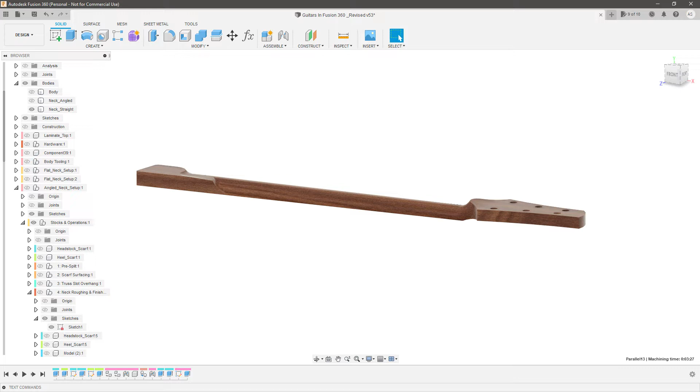In the last video, we took on one of the most challenging parts of guitar machining, flat guitar necks. However, in the world of guitar machining, there's yet another final boss, an order of magnitude more difficult: necks with angled headstocks. Angled necks are probably the #1 thing that intimidates people about building guitars with CNC. And for good reason. It has a very complicated shape.

It requires precision in your glue-ups and even more complicated toolpaths and work holding. Not to mention that there's no single or even two-sided setup where all these features are accessible. We're dealing with a 3-sided machining monster.

So I spent the last few months thinking about the best ways the average person at home could take on such a project. I came up with almost 100 different methods, but each had serious limitations that essentially forced you to choose which part of the process you want to make difficult for yourself. Well, frustrated with my options and about ready to give up, I took to Discord to get viewer opinions on the ideas that I was working with.

I was gently reminded by one of my viewers that I might be approaching this the wrong way, that I shouldn't be thinking necessarily about how to work around the problem or finding the cheapest or fastest way to do this. I should be developing a repeatable process for the guitar community, regardless of complexity. And then, once I have a repeatable process, finding ways to make it more streamlined and accessible to the public.

This changed my frame of mind, as after all, I am a process tech by trade. Process techs develop safe and repeatable manufacturing processes that ensure quality by mitigating the chance of human error. So, if I put on my process tech cap, how would this change my approach? Well, that is precisely what I would like to show you.

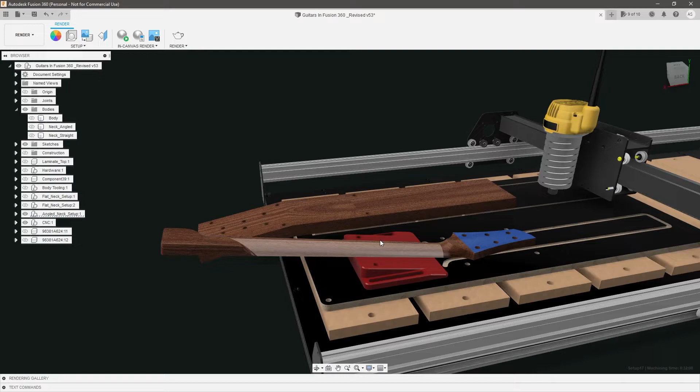You might be able to if you have enough Z clearance on your CNC, but if you don't, then basically you're stuck with just machining this little section. In fact, here's an easier way to show you. So if I hide my CNC, and let's hide my fixture, and just bring up my neck. And if we go into the manufacturing workspace, there's a really cool tool in here that many of you may not know about. So if you go to Inspect, there's Accessibility Analysis.

And what this does is it lets you effectively see what part of your model is machinable with a flat cutter from any given direction. So I selected my model, and so if I'm looking at my model from this direction, everything that's green here is machinable. But if I even tilt it a little bit this way, you can see that these sidewalls and these tuner holes aren't accessible, and this backside's not accessible.

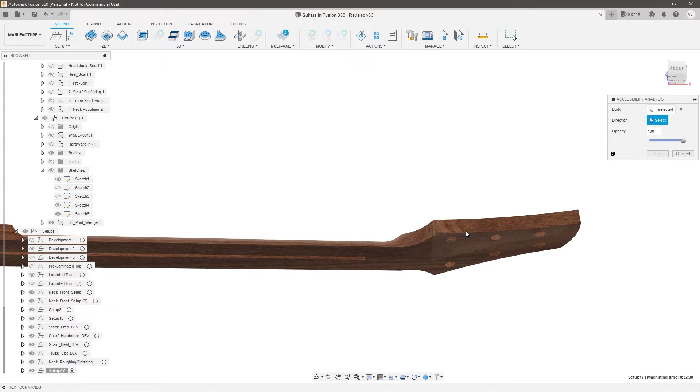And so then I can flip the direction, and I can see, well, if I'm machining it from this side, all of this is accessible, except if I turn it this way, all of a sudden you can see that part of my headstock transition and my tuner holes aren't accessible either. And so that means that really, with those two setups, I can't hit all of the critical dimensions that I need to hit. So there's actually a third setup that has access to just about everything, but it presents a really big challenge for your CNC.

So let me see if I can rotate this real quick. I think I have it on fixed. Let's go to free orbit. There we go. So if I mount my neck like this, right, then I have access to basically that entire top contour of the neck.

The challenge is that raises my neck up at a very extreme angle and really high up on my CNC, and I don't have the clearance for that. So that effectively means that we need to both machine it from this side and then we need to machine it from this side. And then we also need to machine whatever we can from this angle to clean it up. So that's a really tall order, and that means that our work holding has to get pretty elaborate.

But there's also one additional thing that makes an angled neck much more difficult than a straight neck, and that is a scarf joint. Most of you watching this are probably familiar with a scarf joint, but just in case you aren't, essentially what you do is you take your blank and you slice it at an angle and separate it into two pieces. And then you actually take this piece and you flip it 180 and then glue it together like this. What that does effectively is it allows the long grain in the neck to extend most of the way up the neck, but then it switches the angle of the long grain of the neck to follow the actual neck break angle.

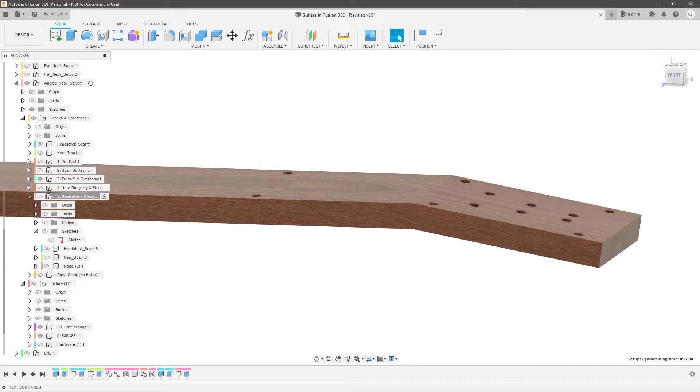And the point of that is if you built this out of a single piece of wood, what you'd end up with is short grain on this front face. That makes it particularly weak under string tension, and it's very easy to snap your neck at that point. So that's also something that we have to take into consideration. So we can either do this manually by ourselves in our home shop, or we could actually find creative ways to let our CNC do it for us. And so now that we've got this out of the way, let me show you guys the method that I put together. All right, here's the game plan, folks.

First thing we're going to do is rough trim our stock on the table saw and bring it down to the correct thickness, either with a facing operation on our CNC or with a thickness planer if you happen to have one. Then we will place our fixture on the CNC and insert 4 dowel pins to align it with the machine. Then we're going to place our rough stock over the left side of the boundary with double-sided tape. This will allow us to bore out the tuner holes and dowel pin holes that will be used for alignment throughout the rest of the process. Then we will cut our outer contour so that we have a perfectly dimensioned blank to help us a lot when aligning the part for glue up.

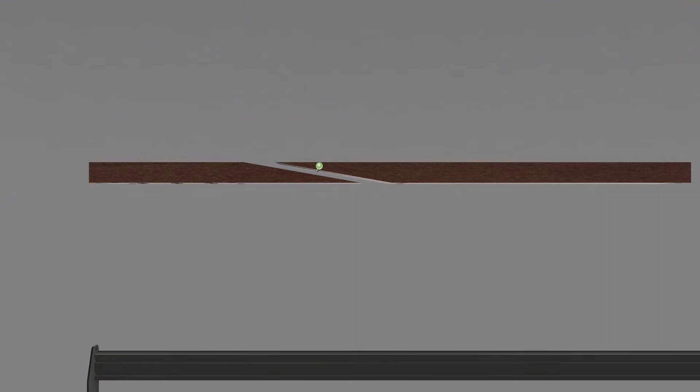Now we can take the blank off of our CNC and split the part in two with either a pull saw or a bandsaw, making sure to stay within a fairly generous safe zone. It's important to stay as close to center as possible during this cut, as any remaining stock on either side of your saw kerf will effectively be our stock to leave in the next operation. Then we will place 2 dowel pins into the fixture and place the headstock side of our blank onto the fixture with double-sided tape. Then we will be able to do a scallop operation with a ball nose end mill to true up the rough cut surface and leave us with a nice scarf joint at the appropriate angle. Then we will take that off and do the same thing for the heel side of the neck.

Now we can take both parts off the CNC and clamp them together without glue and drill 2 dowel pin holes through both pieces so that we can realign them once we apply the glue. It's really important to take your time and get these as perfectly aligned as possible before you drill your holes, because any mistake here can cause alignment issues later on. Then, once the holes are drilled, we will unclamp the parts, apply our glue, put them back together, insert 2 dowel pins into our holes, clamp them together, and let the glue set.

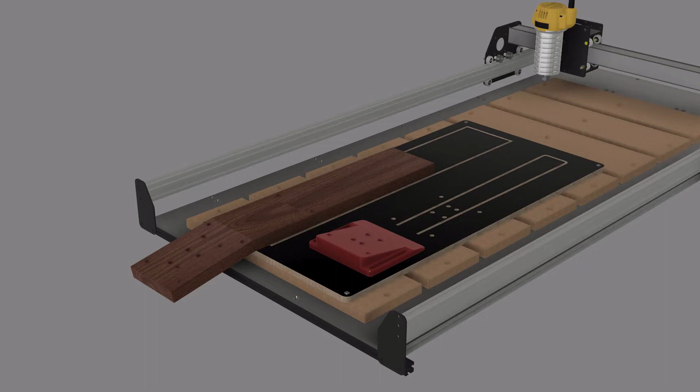Once the glue is set, we can now move our dowel pins on the fixture up 1 row and place the assembled blank on the fixture with the headstock hanging off the front of the machine. This will allow us to mill out the truss rod slot and potentially face off the fretboard side in case there was any misalignment during the glue up. The scarf joint and the fretboard side should now be complete.

Now that we have the front side complete, we will insert 2 dowel pins into the right side of the fixture and install the blank truss side down with double-sided tape. Then we will slide our 3D printed wedge up to the headstock and secure it down with 2 shoulder bolts. These both serve as dowel pins and allow us to secure the part to the wedge at an angle. Then we will tighten down the wedge to the fixture.

The slots in our wedge allow us to accommodate any variation in the angle that may have happened during glue up. Then we will do our primary contour, roughing, and finishing strategies on the main portion of the neck and up to the headstock transition. Then we will take that blank off one last time, flip it over, and secure it headstock down to the same 3D printed wedge and fixture.

This will allow us to do our final contour, roughing, and finishing on the back side of the headstock, making sure to clean up any remaining stock on the transition that we didn't have access to when it was flat. This should leave us with a finished guitar neck ready to sand and apply finish. Okay, so jumping into the manufacturing workspace, let's go ahead and get this started.

So I created a folder structure here called Angled Neck Setup in my models, and I created two components under that called Stocks and Operations and Fixture. So obviously in Fixture, I have my primary fixture here as well as my 3D print and any various hardware that I might need. And then in the Stocks and Operations, I created basically a folder structure for each individual orientation that we're going to need to machine this model in.

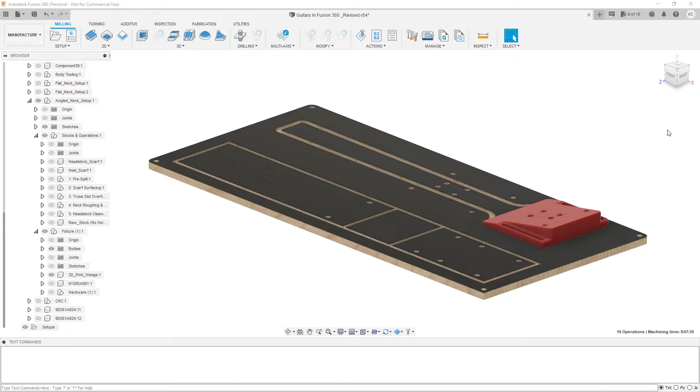And the point of that is because unlike my previous videos where I had the model be the central piece and then I had a fixture that rotated to either side of the model depending on how we flipped our part, we have enough unique orientations here that it was actually just simpler to create different stocks for each operation or orientation and then just copy our body over. And so in here, we'll go through these one by one and then we'll start programming the CAM.

So I have my pre-split operations. So in here, I have my raw stock, which I will face off and drill the tuner holes, etc. And then I have my split stock, as you can see here, where I've basically got my scarf joint. Now, obviously, we won't be machining the scarf here, but this allowed me to generate my raw stock and create this gap here that we will need for machining it later.

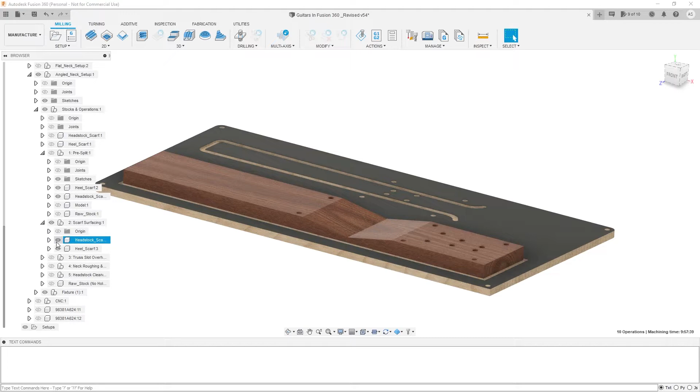So we actually had to split basically our model in two and separate it by a couple of inches so that way we could actually have room to saw our scarf joint without actually cutting into our model. And then after that, I have my scarf surfacing. So if I bring this up, in here, let's go to bodies. Oh, I'm in fixture. That's why. In here, I have two models. So I have my headstock side, and then I have my heel side. And pretty straightforward. We're going to use those as our stocks to go ahead and machine.

And then I have operation number 3, which I'm calling truss slot overhang. And in here, I have my two stocks that overhang. And I also have my model set up in this orientation, so that way I can use that to select geometry for cutting out the truss rod slot. And then in operation number 4, let's hide these real quick.

I have my two stocks here that I used to actually generate a third stock. So I was able to get my angle from that, but then I created a single piece body, because sometimes what Fusion does is if you're selecting two bodies at the same time for your stock, it can throw errors with Z clearance later on. And that became a big problem when I was developing this. So I just used these two stocks to generate a single body for me. And that's the body we'll be using for our stock.

And then we can go ahead and hide this. And then operation number 5 is we have it up at an angle. And I kind of did the same thing where I generated another third stock, but I ended up not using that, and I will actually explain why later.

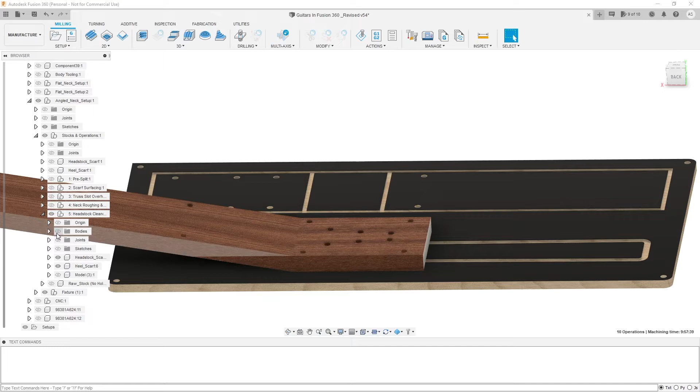But essentially what this let me do, and I have the model here as well, although it's kind of hard to tell. That way we can select the geometry. But effectively what this allowed me to do was have one fixture and then just orient my part in all the different various orientations. And so that way I can make sure everything fits as we go through my order of operations. So let's go ahead and close this out.

And we're going to go ahead and create our first setup for the pre-split. So let's hide this. And actually we need to bring that back, and we'll bring up pre-split. And let's hide these two and bring up our raw stock. So let's create a new setup. And in here, let's go ahead and select our model as our stock, because we don't actually need the guitar in here because we modeled in the dowel pinholes and the tuner holes into the stock itself. So that's actually going to be both our model and our stock.

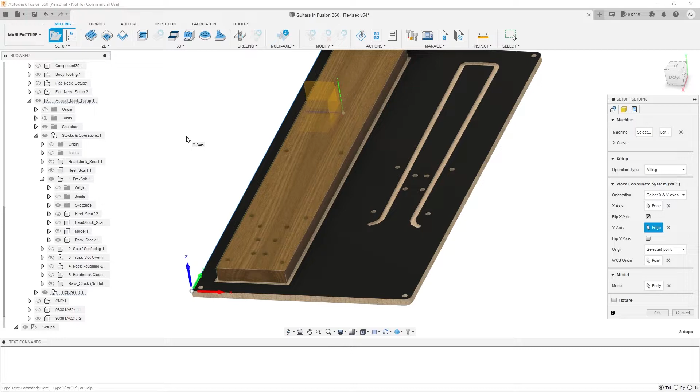And then we'll say our work offset is selected point, this front left corner of the fixture. And if you're wondering why I do that, go back and watch my guitar bodies video where I go into that in great detail. And then we will select our X and Y axes here and here. And then we will flip our X. So that way we have our X going in this direction, our Y in this direction, and our Z going up. And then our fixture we will go ahead and select this body right here.

And then in the stock selection, we're going to say from solid, and we're going to choose the same model. And then hit OK. And now we've got our first setup. So let's hide this for now. And then let's go ahead and do the dowel pinholes. So first things first, we're going to go ahead and take care of the dowel pinholes.

So we'll go 2D boring operation. And then we will select our end mill. And for this, we're going to use a 1/4 inch flat end mill. Hit OK. I've already got my feeds and speeds set up. And then we will go to geometry. We will select all of our dowel pinholes, but not the tuner holes, because the tuner holes are 10 millimeters and I'm using 3/8 dowel pinholes because that's more readily available for me here in the States.

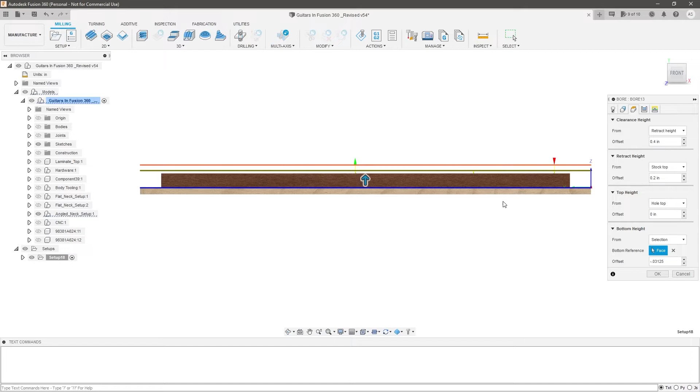And then I can go to heights, and we want to make sure the bottom height selection goes down to the fixture. And then we will go negative. We'll just make sure it goes down below just a little bit. So we'll go negative 0.03125. So it goes slightly below the surface. So we're good there. Top heights, looks like we can keep them the same. Let's just make sure that, yes, top height is from hole top, so we're good there.

Passes, we don't need any multiple passes. We do want some stock to leave though, because we want to get these dead on accurate. So this is basically going to be a roughing pass. So we'll leave 20 thousandths of an inch as stock to leave. Okay, and while we're here, let's go ahead and do the roughing for the tuner holes. So let's go 2D boring operation.

In fact, you know what? Let's right click this, and then we'll say create derived operation, 2D milling, boring. And what that's going to do is it's going to retain all of our previous selections, and we're just going to change our holes. So then we will come to the geometry tab, unselect those, and then select our tuner holes instead. And let's just make sure that our heights are set up correctly. Yes, they are. Go to our passes. Yes, we have stock to leave.

Okay, we are good. Now what we want to do is come back in and do a finishing pass on this where we will sneak up on the dimensions, so that way our dowel pins fit perfectly. They're not too tight and they're not too loose either. They just kind of glide in. So let's do another boring operation. We're going to right click this one, create derived operation, another boring operation.

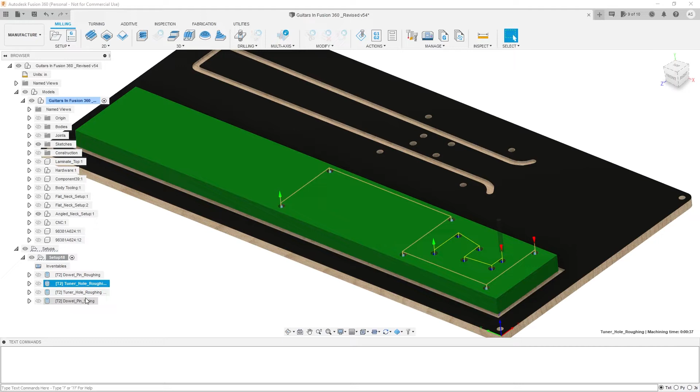And then the last thing we need to do is create a 2D contour on the outside perimeter of the part. The purpose of that, even though we've put a pretty decent size stock on here, is we want to trim it so that it's exactly the same on all sides, because that's going to give you a really nice clean surface to reference off of when you're gluing this up for the scarf joint.

So let's go 2D contour, and we still have our 1/4 inch flat. We're good there. In the geometry tab, let's select this outer contour, and then in the heights tab, we're going to go down to selection, this bottom face. Top height is stock top, so we're good there. Everything else should be fine.

And then depending on what your CNC is capable of, you can either take it in one pass or multiple passes. I personally like to take pretty conservative cuts when I'm plunging through the material. So I'm going to go 0.0625 inch step down, and that should be good. We don't need any tabs because we're going to be using double-sided tape to hold this part down.

Okay, and let's simulate the whole thing. And like always, I'm going to be using comparison view, although in this case it doesn't make a whole lot of sense because our stock and everything is the same. Ooh, that is going too fast. It says tool collides with fixture, but that's only because I'm going down below the surface. That's okay.

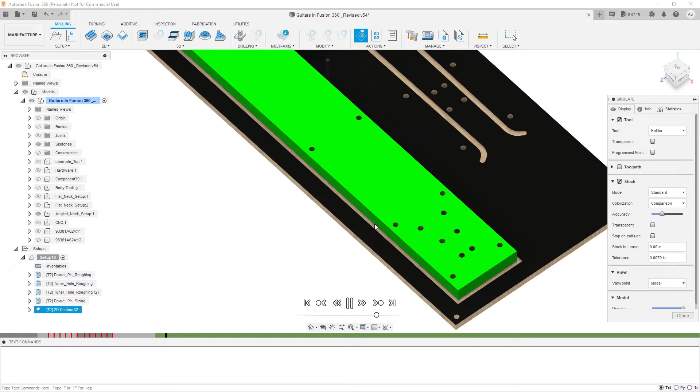So we're going to do our dowel pin holes, the rough sizing of them. Then we're going to do our tuner holes. And then we're going to come back in and resize all of those, and then do our contour. Okay, that looks good to me. So now we can move on to the next setup. And let's name this setup Stock Prep.

And so let's go ahead and create a new setup. And before we select anything, let's make sure in our angled neck setup folder that we turn off pre-split and we go to scarf surfacing. So in between these two setups, you will have pulled off your blank and sliced it. And now we're going to put it back on the CNC and surface our scarf joint.

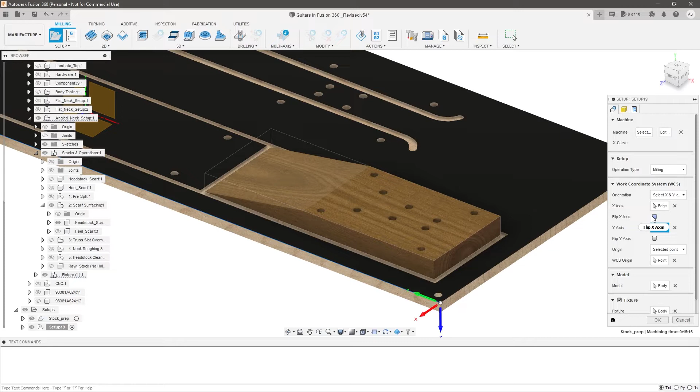So let's go ahead and pull this up and do the headstock side first. So let's say our model is this and our stock is this as well. Let's do our fixture here. And then our work offset is selected point. Same thing as before. Select XY axes here and here. Flip X. Everything looks good. Hit OK.

And now what we can do is come in and do a 3D scallop because we've already got stock to leave on here from cutting these apart. So all we need to do is come in with a ball nose end mill and clean it up. So let's do a scallop operation.

And the reason I'm choosing scallop rather than a parallel or ramp or anything like that is we've got a very, very thin edge down here at this front side. So we need to make sure that when we mill that, it has as much material around it as possible so we avoid any kind of tear out. What's nice about a scallop is that it works from the outside in. So when it cuts this edge, it has as much material around it as possible at that point, so it'll be as strong as we can possibly make it.

So let's go to geometry, and then we will say our tool machining boundary is selection. And let's select this contour right here. And we can say the tool can go outside the boundary. Actually, no, let's just go ahead and do on center. And then let's do contact point boundary, so that way it can go slightly over the edge if it needs to.

And let's make sure we have a ball end mill selected. So under tool, select, and then we'll go find a 1/4 inch ball end mill, or whatever size ball end mill you're going to be using. Looks like I don't have my feeds and speeds set up here, so I'm going to do 16,000 RPM, and we will do 75 inches per minute. That's a pretty decent chip load.

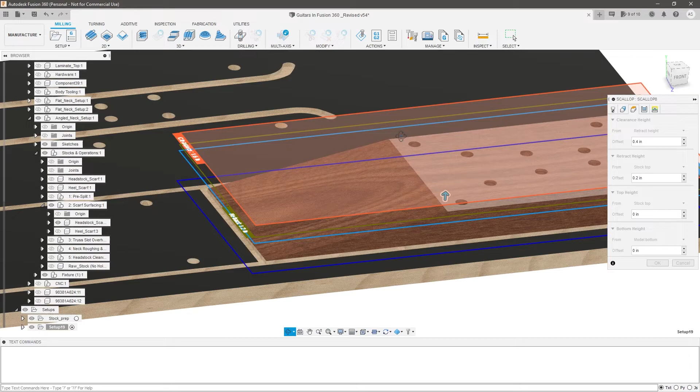We're also going to be taking really small little passes, so we could probably be more aggressive with this, but that's okay. And then our bottom height is model bottom. That'll work for us, or we can do selection down to the fixture. And then we can say passes. We don't need any stock to leave. We just need to make sure our step over is very fine. So we'll go a 32nd of an inch.

You can make it smaller or larger depending on the size of bit you're using. Since I'm using a 1/4 inch bit, a 32nd seems to leave a pretty nice surface finish. So let's go ahead and hit OK. Oops, I didn't turn off coolant. So let's go back to the tool tab, disable that and hit OK. It's going to take a second to generate. And let's simulate that real quick.

Again, it's not going to show the stock here because we selected the stock and our model as the same thing. Really what we just want to see here is the toolpath and make sure it's doing what we want it to do. So let's show our toolpath here. Okay, and yes, it is coming up on that boundary there. Let's see what it does on this front edge. Speed this up just a little bit.

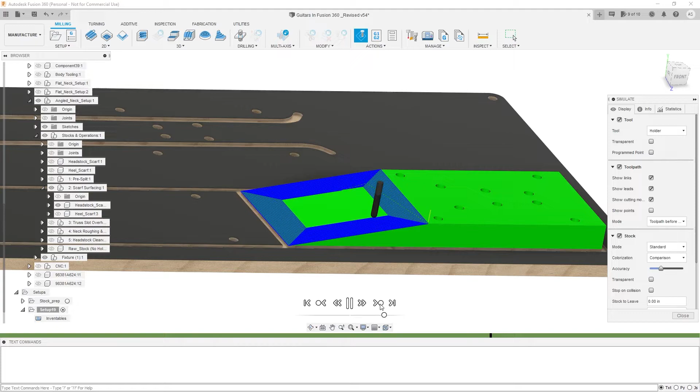Okay, yep, it's just touching that front edge, but it's not having to roll over. I put this little channel in here just in case I needed it to roll over, but that's okay, we don't need it. So let's speed this up a little bit now. And it works its way in, surfacing that whole top face, and now we have a very nicely dimensioned blank that we can just sand very lightly to get any of those cusps off, so that way we have a nice glue surface.

So what we're going to do now is just duplicate that and then change our setup to be the other model. And let's go ahead and name this Scarf Headstock. And then let's duplicate. And then in here we need to edit our setup. We need to hide our headstock scarf and show our heel scarf. So now we just need to change our model to here, and then go to our stock and change our stock to that as well.

Our work coordinate system is already set up for us, and our fixture is already set up, so that should be good to go. Now we just need to update the toolpath, because right now it still thinks that toolpath is on the other one. So let's right click that and go edit. And then we're just going to change our machining boundary and hit OK. And now we have the exact same toolpath, but set up on the other side. And real quick before we move on, let's rename that as well to Scarf Heel.

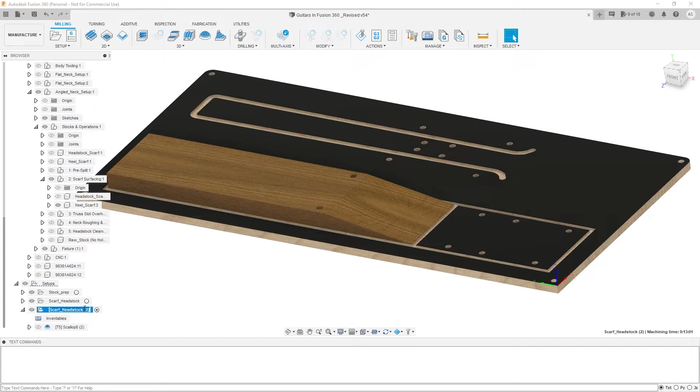Okay, and now let's go ahead and create a new setup. And inside that setup, we need to hide scarf surfacing because we're no longer using that. And now we're moving on to truss slot overhang. So let's show that real quick. And let's hide our stocks for a second, and this time we're actually going to be using our actual guitar neck as our model. So we'll select that, because now we have geometry on the neck that we need to select, like the truss rod slot.

And then let's go ahead and set our work coordinate system. So same thing as before, selected point, select XY axes here and here, and then flip our X. And then on fixture, we'll go ahead and select our body there. And then in stock, we're going to go from solid. And in this case, I'm going to use both of these models as my stock.

Like that. In this case, that works. What doesn't work is when you flip the body over, because then your stock has to basically create a boundary box that's higher than the parts you want to machine. Since it's in this orientation, the boundary box extends below the machine, so it doesn't really matter to Fusion that you have two bodies selected.

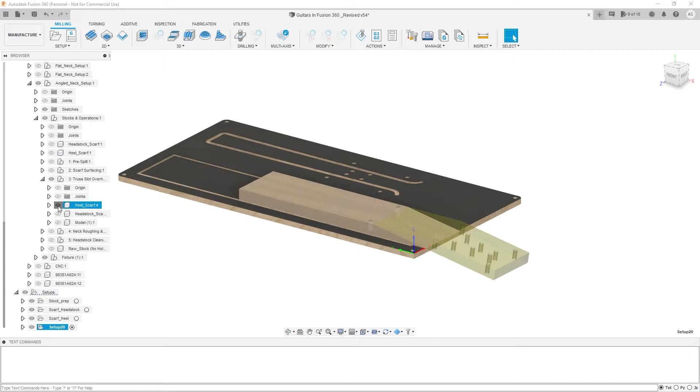But it does matter when, let's say, you're in this orientation, and now all of a sudden it thinks the top of the model is over here, whereas in this case it knows the top of the model is where we want to machine anyway. So doing it this way is not a problem in this instance, but we will get more into that later. So let's go ahead and hit OK. And let's hide our stocks, so we only are dealing with the model.

And let's go to 2D pocket. We're going to do this one by itself first, because we're going to end up doing a stock to leave on it. And then we will come back in and do the others, and then one to clean that up. So that's going to be our selected geometry, that bottom face.

In this case, we need to switch to an 1/8 inch end mill, because the distance here between these two is 0.2188, so it's smaller than my 1/4 inch. This is the only time I'm going to be using an 1/8 inch end mill. So let's close that out, tool library, and we'll go to 1/8 inch end mill, 16,000 RPM, and I'll be a little bit more conservative here. Let's say 50 inches per minute.

And then geometry, we're already good there. Heights, it's already set to selected contours, but I like to forcibly select it down so I know that I'm going down to the right height. Top heights from stock top, so we are good there. And then passes, we're going to do multiple depths, and I'm going to go down 1/16 of an inch at a time. We want to leave a little bit of stock to leave, but only on the side walls, not on the floor. So we're going to take axial off to 0 and just leave 20 thou of radial stock to leave.

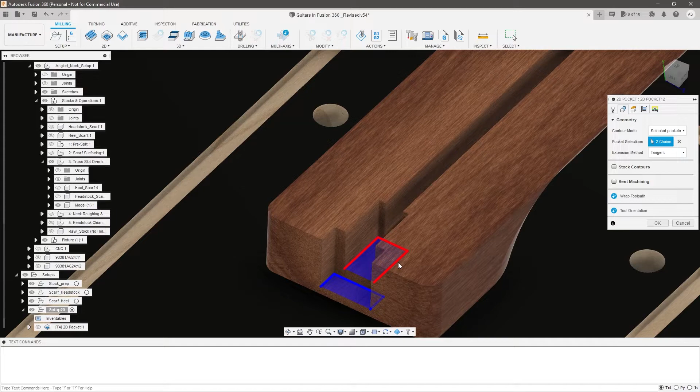So let's go 2D pocket. And then we will go the same 1/8 inch flat. It's already got our settings, so we're good there. And we will just select both of these because it will be able to accommodate for the depth. And then we're going to leave it as selected contours in this case, because that way I'm not only going to one depth, I'm going to whatever depths I had selected.

And then in passes, we're not going to leave any stock to leave at all, but we will do multiple depths of 0.065. And our maximum step over will be 0.06, so a little bit less than half the bit. And we will allow it to go both ways. Let's turn off lead ins and lead outs. We just want it to plunge going in, and we will set our entry positions as right here. That way our bit's not going to try to plunge in outside the model or into the model. We're going to make it plunge right here. Hit OK.

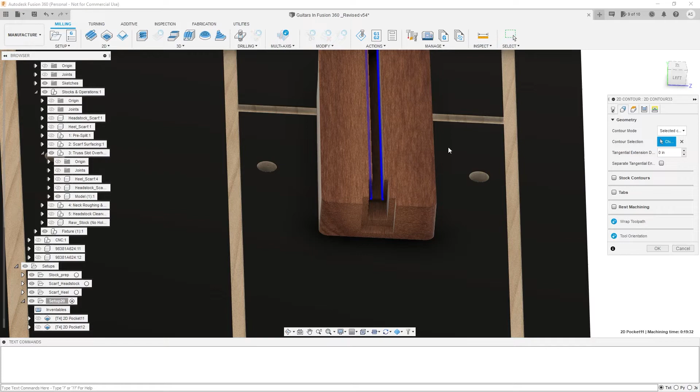That's looking pretty good. Let's go ahead and do a cleanup pass on this, and then we'll simulate this as well. So let's go create derived operation, 2D milling, 2D contour. We've already got our settings, and we've already got our chain selected because we did a derived operation. Heights, it's already going down to that selection. In this case, we want to take off multiple depths, and we don't want any stock to leave. That looks good. So let's simulate this.

Now, just like we did with the dowel pins and the tuner holes, we're going to sneak up on that with this operation. So make sure to save that as a separate operation on your computer, so that way you can take a little bit more off and a little bit more off, etc. So let's just go ahead and simulate that whole thing. Now we can actually see the blue and green because we actually have a stock that's larger than our model.

So it's milling out this side, or not this side, the truss rod. Let's look at it down a little bit. There we go. Let's make sure it goes green to the bottom, but not green to the sides. Yes, so we have a little bit of stock to leave on the sidewall. And we want it to go green all the way around on these inner contours here.

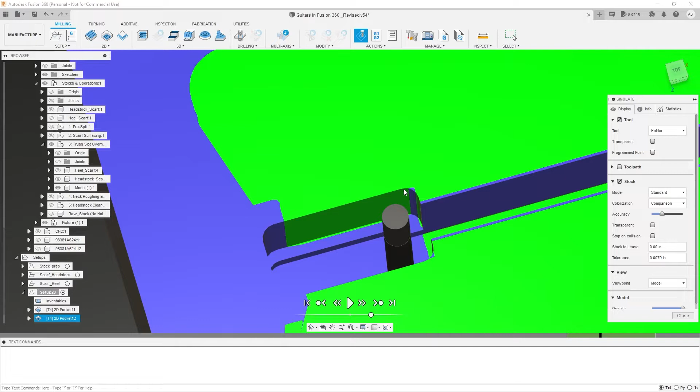Now you will notice that I have a little bit of blue left over, and that's only because I didn't model in the radius into this part of the neck. It's just left square in my model, so it's leaving a little rounded corner. That's totally okay. I'm not worried about that. So we went green down to that surface, and do we go green on this one as well?

Yes. And now, okay, so we have a lead in here that plunged into our model, so we're going to have to fix that. But right now, it is cleaning up that sidewall. So yes, it went green right here. So let's hit play real quick. That looks good. Let's take off the lead in on that last cleanup operation.

Okay, and right click that final contour, edit. Go to our linking tab, uncheck lead in and uncheck lead out. Hit OK. Let's just simulate that one portion real quick. Just make sure we don't run into that again. Yes, we are good. We didn't plunge into our model this time. Okay, we are burning through this pretty quick. So that is already done on the truss rod side.

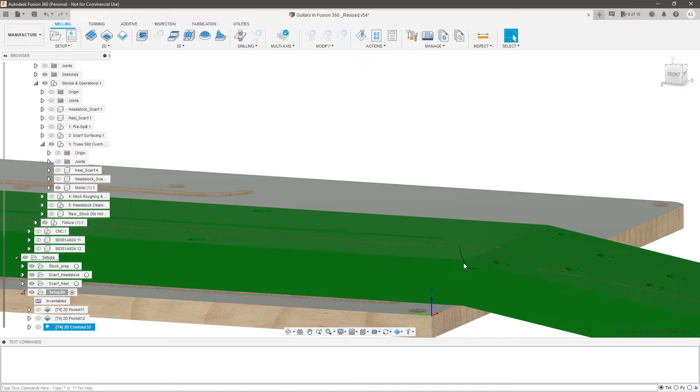Now there's one other thing you could do. So after you've glued up your material, so this actually is a section where the model itself has already been cut and glued, and now we're cutting the truss rod slot. But if you did notice that maybe your scarf joint overhung the face a little bit and you needed to flush those up, you could do a small facing operation to just clean up that entire face along that scarf joint. If that's what ended up happening for you, then go ahead and add a facing operation in here. But for now, we're going to go ahead and move on.

Let's name this truss slot overhang. And that one is now complete. Okay, so let's hide truss slot overhang. That's a hard word to say sometimes. And let's do neck roughing, show that, and let's go create new setup. This is where we're going to get into some really challenging toolpaths. So this is going to be probably the meat of the video right here.

Okay, now that we're in our new setup, let's open up that folder. And model is right here. And then work orientation is selected point right here. Select our XY axes here and here. Flip our X just like always. Looks good. Our fixture is right here. And then our stock is from solid.

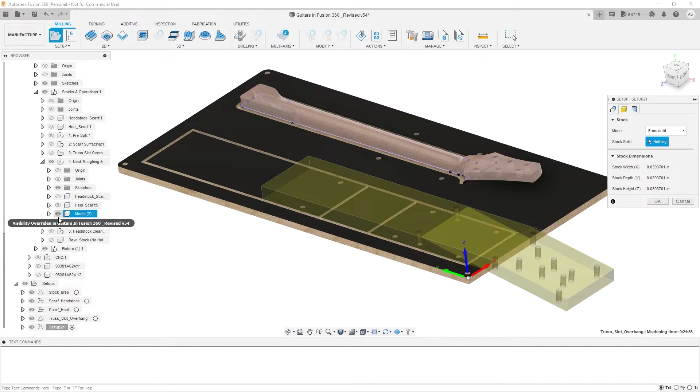And what we're going to do is we're going to bring in this cam stock one. Now remember when I was showing you guys this, I created a separate, completely solid body stock that didn't have two bodies. And there's going to be a very important reason for that, and I'll show you guys that in a moment. So we'll select that. In fact, you can kind of see it's trying to create a bounding box here from the bottom up to the top. And it's hard to see in this light, but it actually extends all the way out. And so it thinks the stock is significantly thicker in this area than it actually is. So we'll go into that in a second. Hit OK.

And let's go ahead and create a contouring operation. And the main purpose of doing a contouring first here is only to give our 3D adaptive and parallel toolpaths a lot more room to work with, so that we can somewhat preemptively avoid some of those rapid collision to stock errors.

Fusion 360 really likes to machine from the outside in, as if you're holding the part in a vise. And it's not really intended to cut a contour first and then machine, but the way we typically do things, not with guitars in general, but in woodworking and CNC routers, is to kind of do it that way. And so we kind of have to work around the rules a little bit, and that's one way to do it. So let's go ahead and do 2D contour.

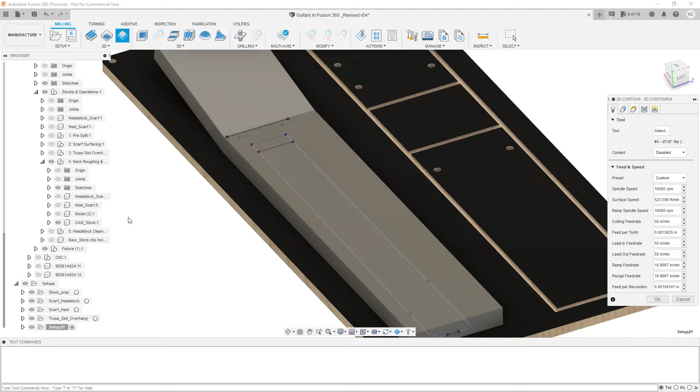And we need to find the sketch in here. So I've got this sketch that we can set up as our contour. So let's hold the Alt key. Let's hide our stock real quick so we can see this a little better. Hold the Alt key, and then we're going to select each individual piece.

And the only reason I need to do that is because I have this as a closed selection, and I don't want to select a contour coming across here because that's going to cut into our model. So I only want to select these pieces here. And if you don't have this, then you just need to create a sketch and project in the faces of your model. So that way you can get access to the whole thing.

And we need to make sure that our arrows are flipped over. So they have to be on this side of the line, not on the inside. So let's make sure everything's flipped to the outside. Got one here.

Okay, that looks good. And then we can come into our, well, let's switch our tool back real quick, because right now we still have the 1/8 inch tool. So we need to go back to our 1/4 inch tool. So we'll go 1/4 inch flat end mill. Coolant is disabled, good. Avoid that error message.

And then we will go to selection, the bottom of our fixture, or the top of our fixture. And this is going to get really tricky right here, and I will show you guys why I have to do this in a moment. So I'm going to not change my clearance height, and let's see what happens in a moment.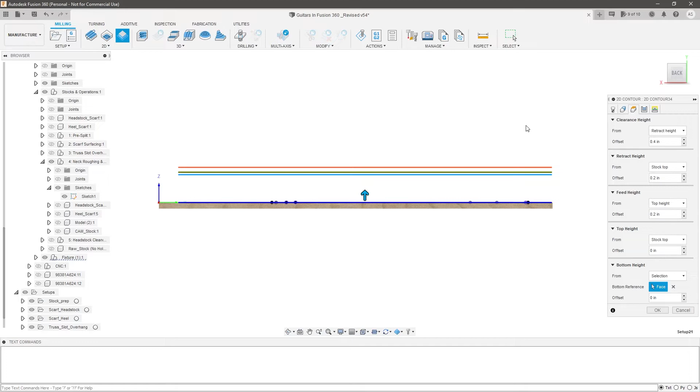And we'll go passes, multiple depths, and we're going to go 0.0625 inches. We don't need any stock to leave. And yes, we do want some finishing passes. So we're going to go 2 finishing passes of 0.125 inches. And that's to give ourselves a lot of little extra room. So let's go ahead and hit OK. Let's see what happens and see if it throws an error for us.

Okay, so you can see already that it's generating way too many toolpaths because it's trying to go from the top of the stock. So we need to actually limit that down. So I'm going to show you what happens if you select the top of this right here. So let's go Edit, and let's go back to our heights. And then in the top height, let's go Selection, because right now it says Stock Top, but it thinks that stock is way up here.

So let's bring back our CAM stock, and we're going to select this top face as our top height. And let's hit OK. And let's see what happens. Simulate that. Might actually work.

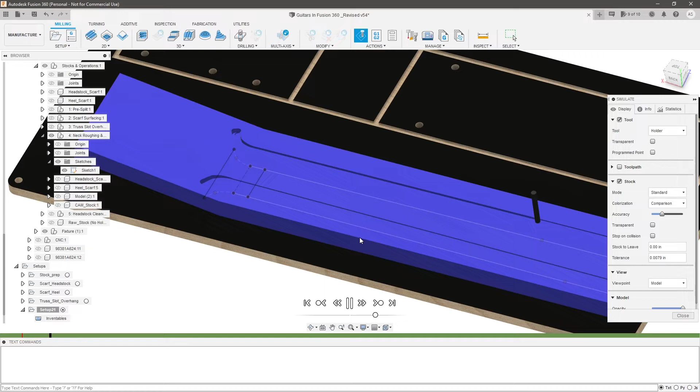Okay, this might be a larger issue on the 3D adaptive, but sometimes what happens is Fusion does not like to machine at a lower height than the top of the model, right? So the clearance height, basically what happens is when you start your toolpath on your CNC, it's going to try to travel up to the clearance height and travel over and then come down to your retract height and then go down to your top height.

And if your retract height is something significantly lower, in fact, that might be why it worked. So let's pull that up and check real quick. Let's go Edit, Heights. So it's coming from retract height, and this one says Stock Top. So let's change this to Selection of the top of our CAM stock here and hit OK. Of course, this is probably still working again for us. It does look like it might be trying to cut in.

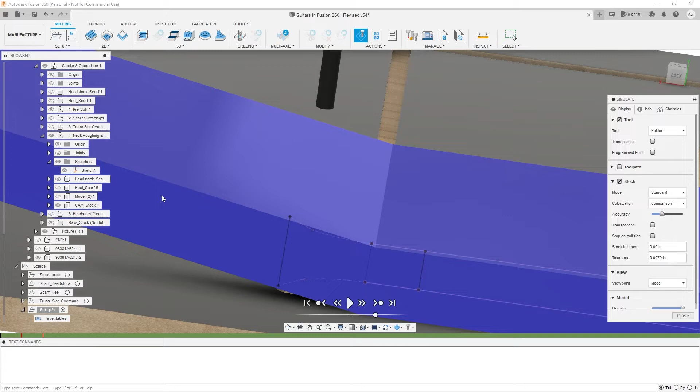Okay, so it is colliding with the stock. Let's see if we can pause that real quick. So it's not actually touching anything right now, but it's actually colliding with the stock. And that's because it's trying to rapid at this point, because as far as it knows, you don't have a model here, right? Because you put your clearance height as just slightly above this section, not the top section.

And so what can end up happening is you end up generating a lot of errors in your toolpath if you don't set your clearance height up really high up here. Now that presents a really big problem for us because this is taller than my CNC Z height. And so if I set my clearance height here, the first thing my machine is going to do is travel up and crash at the top of my Z height. And I won't even get to my toolpath and I'll hit the E-stop.

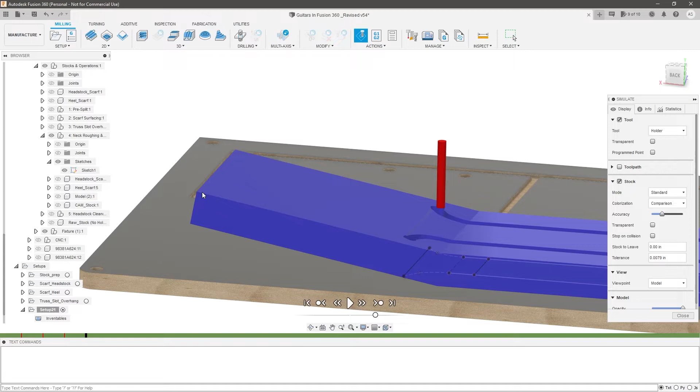So what we'll probably have to do to avoid some of these errors is set our clearance height really high and then just go into our G-code when we post-process this, find any numbers that are at our clearance height, and change those values. So that way we can manually override this.

Or you can deal with any of the collision errors if you'd like. Just pay really close attention to make sure it's not slamming into your fixture or into your model or anything like that. So the way we're going to solve this is we're going to go back to our contour and hit Edit. And then in the Heights tab, let's do this one by one.

So let's check our bottom height. Our bottom height does need to be the bottom of the model. Our top height, we only really want it to start cutting at the top of this CAM stock, and so we're fine with that. And then our feed height, that is where the cutter stops doing a G0 rapid and starts applying our feed rate that we applied in our tool tab, so this 90 inches per minute. That is the point of where you will no longer get that error.

So we need to make sure that our feed height is above the start of our cut up on this headstock in the contour. So let's go ahead and do from selection, and then we'll say from our highest point that we selected in our contour, which is this wing right here, and we will say like 0.5 above that. And then we will say our retract height is the same thing. So it's going to retract to where we know we are safe. So it's like a little safe zone both in the G0 rapid and in our retract.

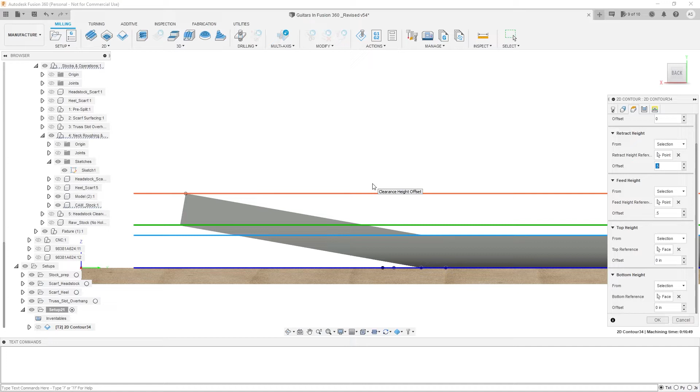Now, you won't have to do this if you have the adequate Z clearance for your machine. In my particular case, I don't. The top of this headstock is about 2.5 inches for me. That's taller than my Z clearance, so this is what I have to do. So let's just go ahead and hit OK, and let's try simulating this and see if we get any other errors. So right click, simulate.

Let's hide the CAM stock and run it through. Okay, so we were able to get rid of those errors. So we're going to end up applying that same technique to all of the other toolpaths we're going to do in this setup.

One last thing I forgot to do in the contour. So let's go back to edit real quick, and let's go to geometry. We're going to add tabs to just the heel side, because right now we are securing down the blank with double-sided tape, which is fine for this operation.

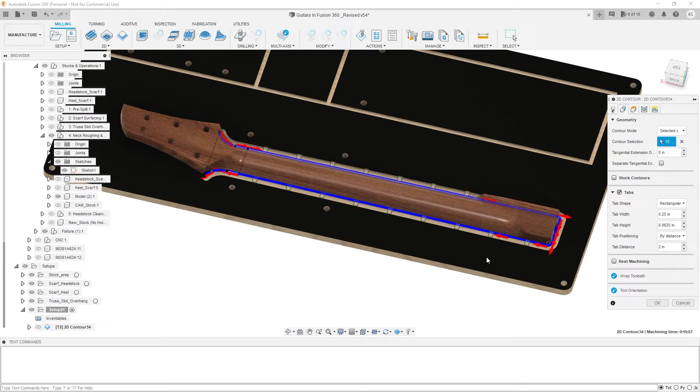The reason we're going to put in tabs is that once we take this off the fixture, and we put it onto our 3D printed wedge, we don't want this to be loose and be able to dangle inside of our stock. So we actually still need our heel to be secured to our stock for the next operation.

So what we're going to do is we're going to turn on tabs, and then we will go at points, and we're going to say at this point, and let's rotate the other model over, and we'll say at this point. Now I am using my sketch selection still, the one that I did for my contour to develop this. When I had that turned off, it didn't allow me to select these points on the heel.

And then I'll say from here, here, and here, and the tab height can stay 0.0625, but our tab width, we're going to go ahead and make 0.75. Something pretty meaty, so that way it's very unlikely for this to actually snap off. And let's go ahead and hit OK, and we'll simulate one last time, and then we'll move on.

Okay, let's just make sure the tabs show up the way we expect, and let's hide our fixture. Make sure we go all the way through with our tabs. Yes, we are good. Let's check the bottom side. Yes. Okay, that's looking good. We're green on all sides of the contour, and we have our tabs, and we were able to avoid those

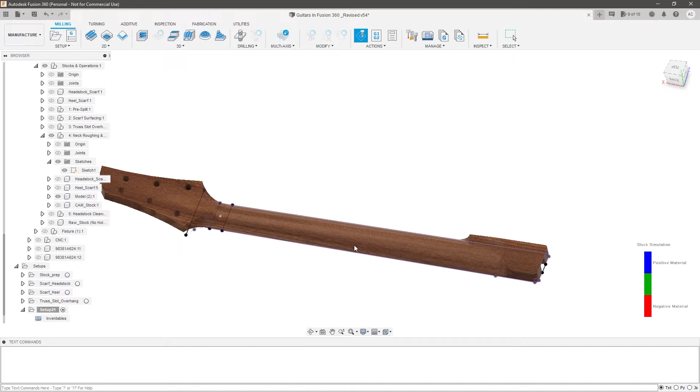clearance issues. So now let's close out of the simulation, and let's do our big 3D adaptive to clear out most of the material on the neck. So we will go 3D adaptive clearing, and then we want our 1/4 inch flat still, so we're good there. And in the geometry tab, we're only going to machine up to, here, let me close out of this real quick. We're only going to machine these surfaces and the heel.

We're not going to go into the headstock transition, because what will happen later is as we flip the part up on this angle, that's going to really complicate our selections and what we're able to machine and clean up on this surface. So we actually want to machine this entire surface of the transition from this angled view. And that's because that's at the point where we have access to all of that geometry. And we don't want to end up really cutting that twice.

Because if we end up cutting that section twice, we might end up with little errors or misalignment issues, things like that. So we're going to cut this transition on the angled face, and we're going to cut everything else in this orientation. So let's go back to 3D adaptive clearing, and we've still got our tool and stock contours. I've got a selection or a sketch here that basically starts from that point. And so this is the area that we're going to be machining.

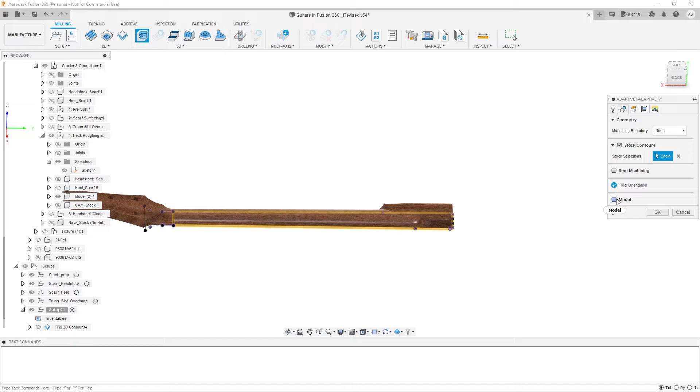And then let's turn off rest machining and check model. We want to make sure that it's not trying to machine anything else. So we're going to say we want to select all of the surfaces on the top of our model right here. And we don't want to select any of these contours because those ones are already green. Those are already solved from the contour. And then our machining boundary will be selection. We're going to use the exact same selection, and tool can go outside of boundary. That's just fine. We might need to add an additional offset, but let's see in a moment.

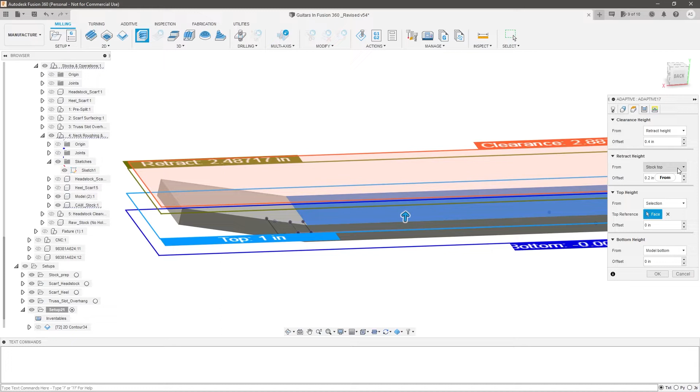And then in the heights tab, we're going to do the same thing we did before, except in this case, there is no feed height. So our retract height needs to be our feed height, essentially. So we're going to say the bottom needs to go to the model bottom, which is totally fine. And then our top height needs to be from selection, not stock top, because remember our stock top is technically up here. So let's bring back our cam stock, and our top height is going to be the top of this area right here. And then our retract height is going to be from selection.

Let's hide our cam stock, and let's go from right here and do the same thing we did before, 0.5 above that. And then you might not need to go that high in this particular case because we're not machining anything over here, but we already know from the previous operation that that's a pretty safe value. And then let's go clearance height is from our top of our cam stock, and we'll say 0.4. That turned this back to black because it didn't like that the clearance height was lower than the retract height. So that should be good.

Let's double check this again. So we are going from, bring back our model. I think I selected the wrong thing. We want to go from here to 0.5. There we go. That looks a little better. And then in the passes tab, what we want to do is we want to go to both ways, keep our optimal load at 0.1.

That's fine. And then we will do our maximum roughing step down of 1/16 of an inch so that each layer that we're going to leave for our ball nose end mill will be 1/16 inch deep. And then we'll definitely leave stock to leave. And let's go ahead and say order by depth. That might be unnecessary, but that will allow our tool to stay in a concentrated area based on the depth that we're currently at. And then let me just double check. Do we have anything else we need?

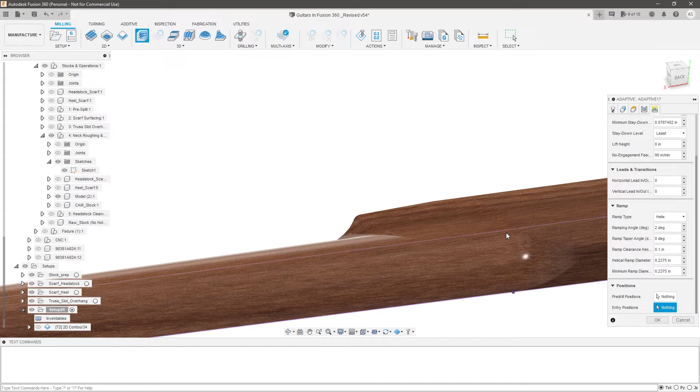Let's go to our linking tab and scroll down. Let's take off any lead in or lead out transition, and let's assign at least one entry position. So that way we can make sure as much as possible that we're not starting in an area that we don't want it to machine, like the transition. So we'll say from that point right there. We can also say if it lets us, sometimes the selections here kind of suck.

And then we'll say like right here, and right here. So those are the areas that the program is technically allowed to enter the stock from, but there are certain circumstances where it no longer is going to be cutting that area and it's going to come in down on the side. And so we still might run into some issues, but let's hit OK and see what happens. Might take a second to generate.

Okay, so let's simulate this. Let's see if we have any errors. We still do, so we might not have perfectly solved that, but let's go ahead and hit play. Let's make sure we have stop on collision checked. So it's going to go through that contour, and then it's going to enter in from that first spot that we designated and start clearing out material.

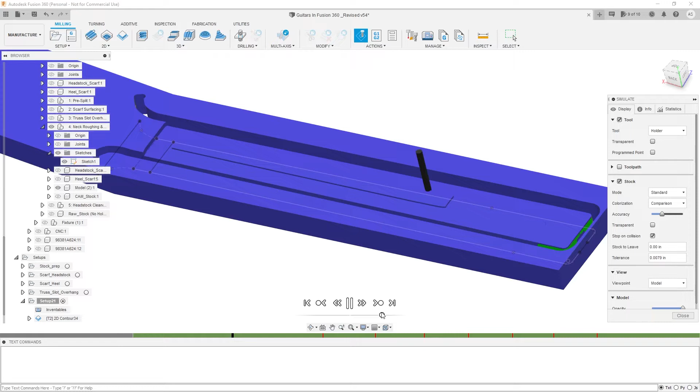Do the first layer, same thing on the second layer. Keep going, whittling away this material. And then our first one is over here. So let's back that up just a little bit and play it pretty slowly, and let's make sure that what's happening is something we're okay with, because we've already set up our clearance heights, etc., and we won't really get another opportunity to solve some of these in this particular type of model.

So as long as we're okay with what the cutter's doing. I'm typically okay if it's plunging into the material like that, but what I don't like is if it's side loading the cutter. If it's side loading the cutter really hard, that can cause my CNC to lose steps and I'll need to find a different solution. So let's slow it down and hit play.

Okay, it's coming in here. Let's see what this is going to do. I'm going to turn off stop on collision and slow this down. Okay. So you can see it's still not touching anything, but that's because we don't have a feed height. So we're still getting an error of rapid collision into stock. But let's see, it's just going to plunge down.

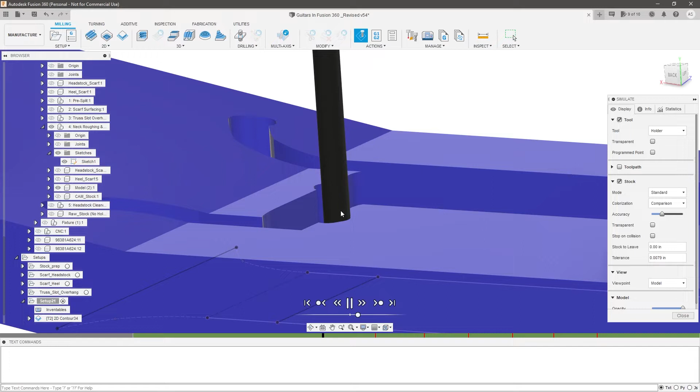And I'm actually okay with that because my CNC can handle plunging. What it can't handle is major side loading of the bit, because then it can cause it to lose steps. So let's just check each one of these as we're going through and make sure that's what's going to be happening in the cut. Otherwise, we might need to change something. Okay, we've got this one, which looks like it's going to be the same. Oh, we teleported to the other one.

Okay, it's going to come in here in a second. Okay, just double check this. Yes, that one's plunging as well. We're okay with that. And then we'll check this one as well. So it's going to retract up, come back down. Nope, we didn't hit that yet. That's further forward. Okay. Yes, it's going to plunge there again.

So let's go to this one. If you didn't know, you can zoom in on the timeline here if you just scroll while your mouse is over it. And that's actually quite helpful for getting in on some of these longer operations. Yes, that one is plunging as well. Let's check this one. That one is as well. I think that's going to be the same for all of these. So let's just check again.

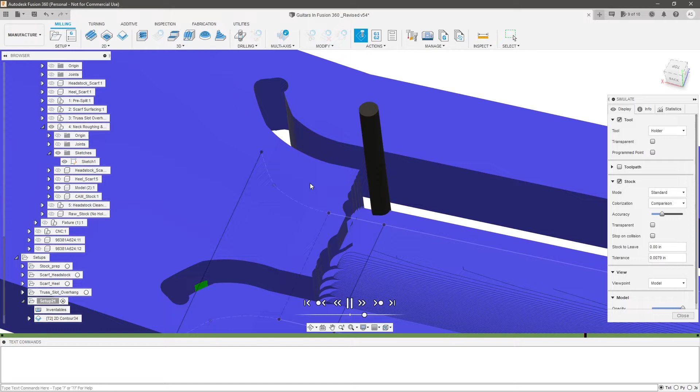Same thing, but this one, look, it's just barely clipping that material. It's totally okay. And let's run it through the rest of this real quick. That's looking pretty good to me. So let's zoom up and make sure that everything that we want touched is touched before we go back in and make our changes. So we didn't touch these outer walls. We're good there.

We look at this. Our tool was allowed to go outside of this boundary. So that way we left a clean surface here for our ball nose end mill. But we're not actually still cutting into our model at this point. So that's totally material we were going to end up removing anyway. So we're fine that this went outside the boundary a little bit. So that looks good. So what we're going to do is we're going to right click and change our step down.

So adaptive edit, and then go into our passes tab. And so our maximum roughing step down is 0.0625, but our fine step down is 0.00625. So we just need to make those the same, hit OK. This should load significantly quicker now because there's so many less toolpaths. Yes. And let's go ahead and hit simulate one last time. Just run it through and double check.

There's our errors. Okay, so that's looking more like what I was expecting. These ridges here are significantly taller, and we cleared out all the material that we need to, and so I think we're good to move on to our ball nose parallel path. So let's close this out.

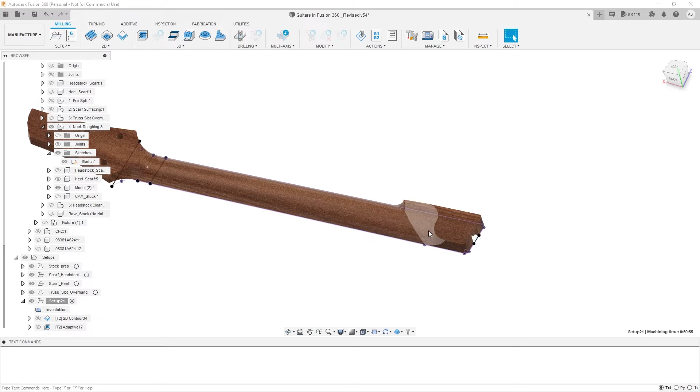Actually, before we move on to the ball nose, one thing we forgot to do was clean up this face, because we did leave stock to leave on this face. So let's do a 2D facing operation while we still have our 1/4 inch flat end mill. And then in our geometry tab, we're going to select this contour right here. And then in the heights, instead of model bottom, we're going to go to that surface right there. And then our top height is going to be the same cam stock top.

And then in this case, we have a feed height as well. And so we will go selection, again, the highest section that may or may not be machined. And we'll do 0.5 as our feed height there. Retract height is going to be the same as from this selection plus 0.5. And then our clearance height. So selection is going to be from the top of that stock. So right there, and we'll make that 0.

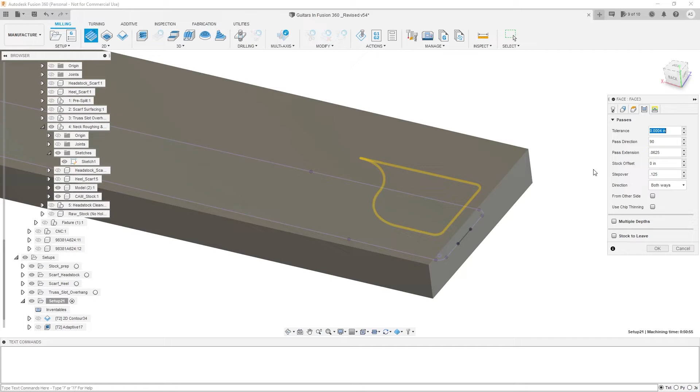And then in passes, it typically orients in a horizontal fashion. So let's go ahead and switch it to 90 degrees. So pass direction will switch to 90. And then we will apply an extension of 0.125, actually 0.0625. So that way it cleans up this tiny little area right there. And our step over, let's make 0.125, so half of our bit. No multiple depths, no stock to leave.

Let's check that real quick. And so we'll just simulate that operation. Let's hide our cam stock. Okay. And let's make sure that it's not going to hit that side wall here. So let's watch this cutter as it comes through. Okay, we're good. We probably could have applied a little bit longer of an offset, so if this doesn't clean up very nicely, we might be able to do that.

Coming through. Okay, so we do have a little bit. I don't know if we're going to be able to get all of that, but we have a little bit more breathing room here because we applied finishing passes on the contour. So let's make that offset just a little bit larger. So let's go 0.125, and let's make sure that our bit doesn't end up crashing. So simulate.

Okay, and let's slow it down in this corner, make sure we're okay. Yes, we're okay. It didn't hit the sidewall. So let's see what that corner ends up looking like. Okay, I'm okay with that. There's a tiny little piece there, and that's going to end up getting cut off by the ball nose end mill anyway, but we don't have a giant piece that was unmachined. So that looks good to me. Let's go ahead and move on to the ball nose end mill.

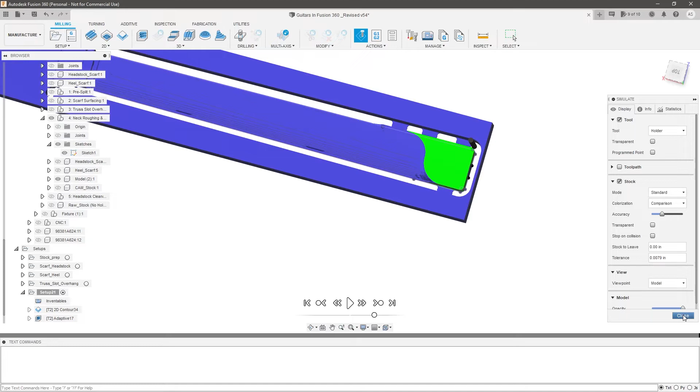So let's set up a 3D parallel pass, and we're going to change our tool to our 1/4 inch ball end mill. And then we're going to go to Geometry tab, and our machining boundary is going to be that same selection that we did for the roughing. So we're only cutting this part of the neck, not the transition. And then we are going to say avoid touch surfaces.

And what this allows you to do is say you can machine everything within this boundary except these surfaces. The toolpath has to work around them. Or what you could do is you could select touch surfaces and say, well, within this boundary, it has to touch these surfaces. So you can have either or. So we're going to say avoid, and we're going to avoid all the areas on the neck pocket.

So like that. Make sure we have this face not touched because that's already done as well. And that looks pretty good. So we want to make sure the tool is on center boundary. So if it's outside the boundary, it's going to have the same limitations as the roughing one earlier. But we actually don't care about that. What we care about is that the cutter is cutting everything that's within this boundary, but is also allowed to go just outside of it down on this bottom corner here.

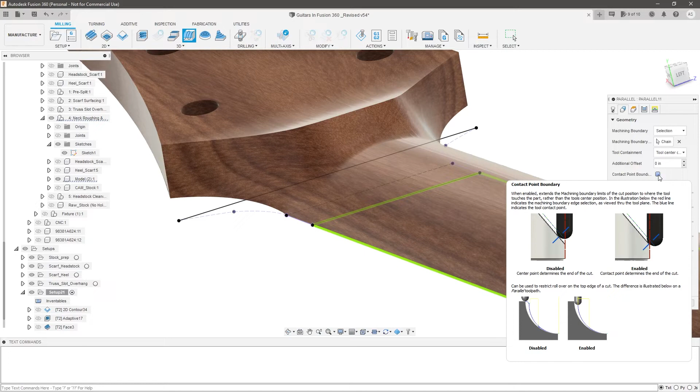So we're going to turn on contact point boundary. And what that does is that allows the tool to extend past the boundary line so long as it still has material to cut. So we're going to go ahead and do that and hit OK. If you don't do that, what ends up happening is sometimes you get a little flat spot on the bottom here. And then in our Heights tab, we're going to apply the same thing we did before. So exact same thing here.

Top height is going to be the top of our stock. So let's bring back our cam stock right there. And then our retract height selection, let's hide this, is from here plus 0.5. And our clearance height selection is from the top of here and no additional offset. And then in the passes tab, we want our step over to be pretty fine. So we're going to do a 32nd of an inch.

In this case, I learned from the last episode that I don't need to change the pass direction. And I don't think we'll need to change any of these here. So let's go ahead and hit OK and see what happens. I didn't disable coolant, so let's do that. Hit OK, let it generate. And then we'll just simulate the adaptive and that one. Let's hide the CAM stock and simulate. Okay.

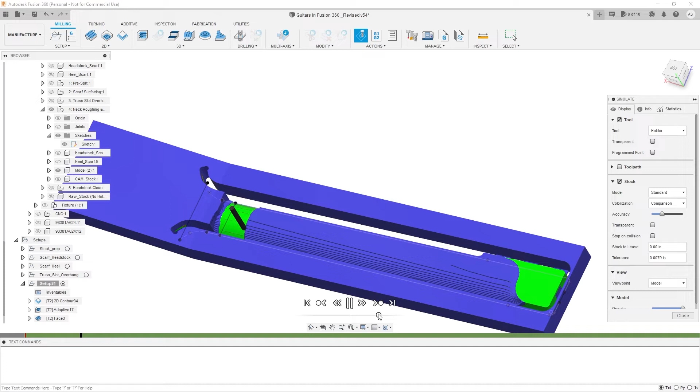So, I had the facing operation. The roughing one was already done. Okay, so we did get one error right at the beginning. Everything else looks pretty good. Let's just double check. And let's look at our boundary here. So yes, our sketch is right here. Everything on this side of that boundary was machined. Everything on this side just kind of got clipped, but that will get taken care of later. Just make sure we don't run into any other issues. And we'll look at that error at the beginning.

Yep, it did clean off that little piece left over from the facing operations. So we are good on this side. Let's just go back to the beginning to that little piece right here. And let's say stop on collision right here. And what is this? What is happening here? Rapid collision with stock. So let's zoom in a little bit. Bring it right before it. Still had it way too fast. Okay.

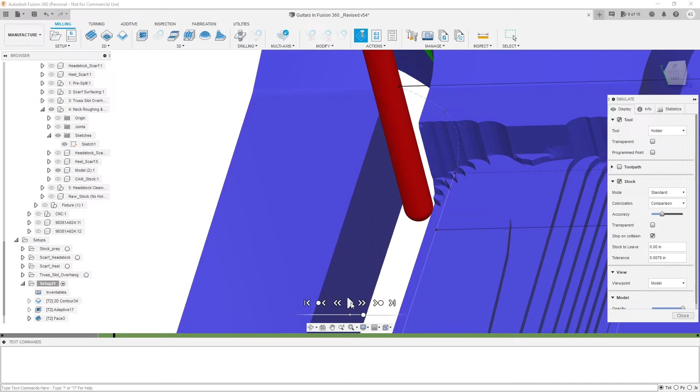I don't know why that one's triggering. That one looks perfect to me. So let's speed this up. Turn it off of stop on collision. Okay. I think that's fine. That's doing exactly what we want it to do, but it's detecting that some part of the stock it's colliding with. But looking at how the end mill is interacting with the material, I think that's totally safe, and I'm fine with that. Yeah. Okay, we're going to leave that be, and now we're going to move on to our last setup, and then we'll be able to be done.

Okay, so setting up for the final operations, let's go ahead and create a new setup. And in here, we're only going to select this part of the scarf joint, because everything that we're machining that's up on this area right here has basically mostly been machined already. So let's go to our stock, and we'll do from solid. And then in here, let's bring up our operation 5. And we want to select this as our stock right here. This will help us avoid a really, really tall clearance height. Now, the other one is already really bad, but in this case, it's even worse because we've angled it up this way. And I'll show you that in a minute.

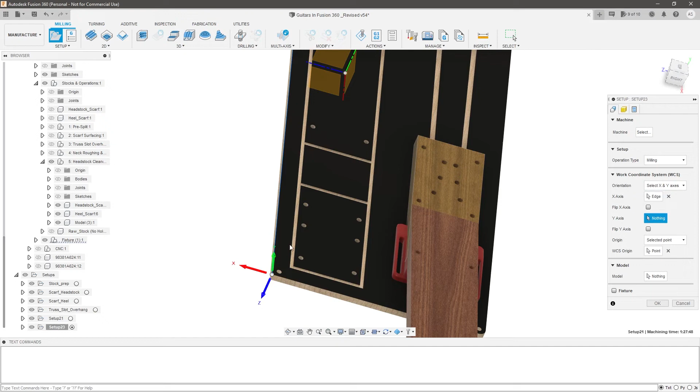But let's go to origin to model box point. Right. Let's go to this front corner right here. Or sorry, selected point right there. Select X and Y axes here and here, and then flip our X axis. So we're good there. Our model is going to be this right there. And then our fixture is this and our 3D printed wedge. So let's go ahead and hit OK.

That should be good. And then we'll set up for a 2D contouring to come in and clean up this side of the transition, because we already did cut this contour right here, but what that didn't hit was this flat spot right here. So we need to go ahead and just run another contouring operation, which will also have the added benefit of giving us more room for our 3D adaptives to come in and work with.

So let's do 2D contour. And then what we will select as a geometry, let's see if we can, so we're going to go up to this line right here. So we should be able to select everything going around. So we need to switch our tool back to our 1/4 inch flat. And then in the geometry tab, hold the Alt key, and we're going to select everything going around up until that point.

So turn our model around. There we go. And right here, and right here. Let's make sure all the arrows are on the correct side. It looks like they are. Okay, we don't need any stock contours or anything like that.

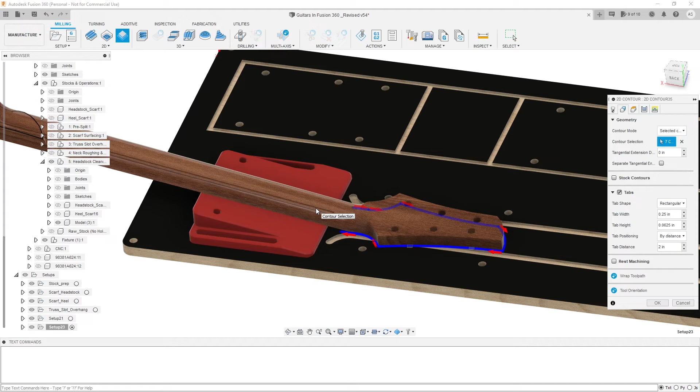We do want tabs for the same reason as before, because this has been cleared out. And we are going to be holding on to our stock with shoulder bolts here, but we're not going to really be able to hold on to the model itself once we cut through this. We will be able to hold on to the front face with double-sided tape if you'd like. In this case, I'm just going to opt to use tabs.

So let's go at points, and we'll say here and here. And then we will say here and here. And let's make those 0.75 wide. Let's make those a little bit taller. There we go. Again, we can always pare these away with a chisel or anything.

And then in the heights tab, because we selected our stock that doesn't extend way up here, we don't really have to do the same trick anymore. So let's do top height is stock top. That's fine. Our feed height, in fact, I think we can leave all of these the same. We might have to check that in a minute.

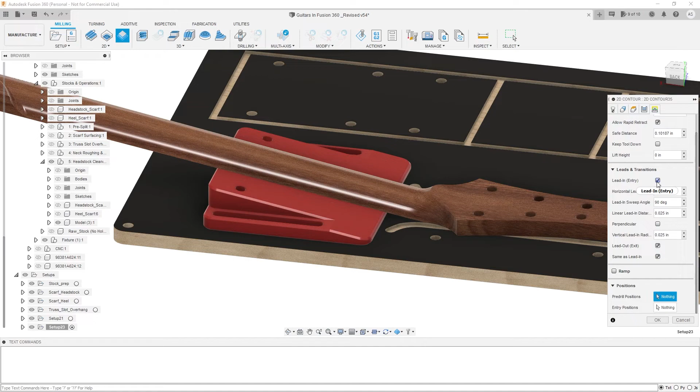And then in the passes tab, we want multiple depths of 0.0625 because our bit is going to be plunging all the way around. And then we want 2 finishing passes of 0.125 wide. And then in our linking, we're going to turn off any lead in or lead out because we're just going to plunge down a 1/16 of an inch and start cutting. That should work. So let's check that real quick.

Now I wanted to show you guys the material that is still left over that isn't within this stock. It's pretty minor, and so I don't think it's going to be an issue for this contouring operation. So let's see if I can pull up this one right here. And let's just click on our stock. So this right here, this yellow portion is the stock that we selected. This is the stock that kind of overhangs some of that. And this is the point of which we machined in the previous setup.

So if you extended this line up to right here, there's just a tiny little wedge here that has remained unmachined from that previous one. But the added benefit of not having to go through all of these clearances and just plunge through an extra 1/16 inch of material just on this side right here, I think is well worth it. So I'm okay with that, but we can simulate it if we'd like. But let's go ahead and do our 3D adaptives, and then we'll come in and clean everything up.

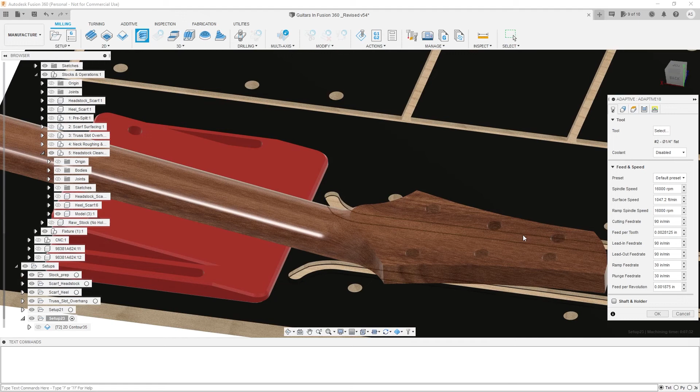So let's do 3D adaptive clearing. And then let's make sure we still have our 1/4 inch flat. We're good there. And then machining boundary is going to be selection. And we're going to select both of these contours right here because we want it to machine everything that's within here as well, because there is material left over from the previous op.

And then no stock, actually no, we do want stock contours. So we're going to select the exact same thing. Hold on. Sorry about that. I didn't mean to hit escape. 1/4 inch flat. Machining boundary is these two, and our stock contours are those same two. And then turn off rest machining.

And then in model, we're going to select the faces that we want it to cut with this, but not these side faces because we just did a contouring operation there. So we're going to select the transition and these top faces right here. And include setup model is fine to leave on because that will help us detect these holes.

And then we can say our bottom height is model bottom, so that's good there. Our top height is going to be the top of the stock that we selected. Our retract height, let's give ourselves a little bit more room on top of that. And our clearance height will be the same as our retract height.

So we can go from retract height 0. So that way they'll be the same. And then in the passes tab, we want to machine both ways with a 0.1 optimal load in both directions. And then we want to set our maximum roughing step down and our fine step down, like we did before, to 0.0625.

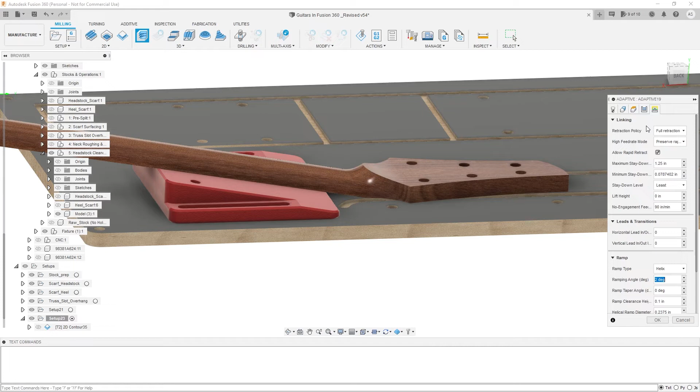And then we do want stock to leave, because we're going to come back in with that same flat end mill trick that we did in the last video. And then in linking, there's no lead in, lead outs, but we can turn these to 0. That should be okay. We did get an error, so let's see what happens. Okay, Z clearance is too low for the surface.

So that tells me that we still have a problem with that clearance that we set up. And that is likely due to the fact that the model is extending far beyond our stock. And again, Fusion doesn't like to have clearances or anything that is not above the model. So contrary to what I said earlier, I think we are going to have to go back in and make that extremely high clearance height, and we're just going to have to edit it out in the G code.

So let's do clearance height from selection, and let's bring back our heel side of the stock to right here. And then our retract height should be able to stay the same. Let's find out. Yes, it is generating now, so you can tell that that immediately solved the problem. We needed our clearance height to be above the model.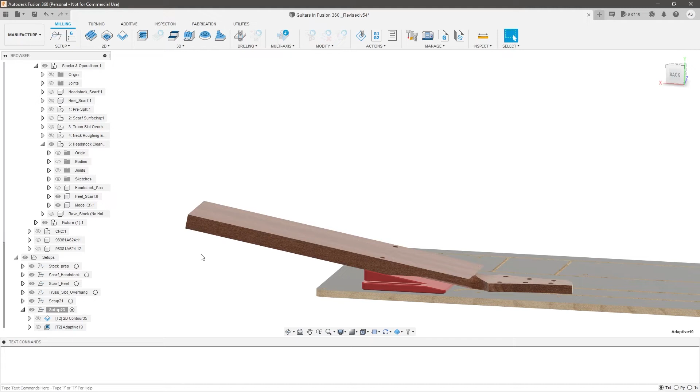And because our model went all the way up here, we are kind of pushing the boundaries here of what Fusion finds acceptable types of machining. Because most machines that we're going to be performing this type of stuff on is like a big 5-axis machine, and they won't have those Z clearance problems. And so a professional machining center won't need to go through all this extra work. We're just having to do that to force Fusion to work with this on our limited Z height little X-Carve that I've got.

So let's simulate these two, make sure we don't run into any problems before we move on to cleaning everything up. So let's hide that heel scarf. Okay, so we're doing our contour first. We do have another error of rapid collision with stock. So we might not have put enough of a boundary there. So we'll check that. Let's go through the contour, make sure it leaves the tabs. Yes, it did leave the tabs, so we're good there.

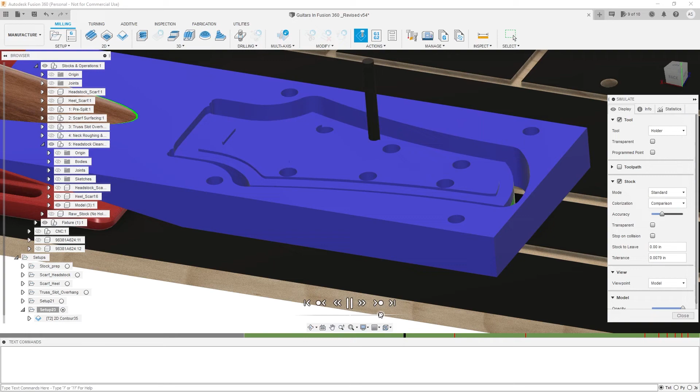Okay, and let's make sure that everything's okay with the clearing. So it is important to remember that right at the beginning of this clearing, it's going to be plunging a little bit extra. So it's going to be going like 1/8 of an inch plunge at this point, because we have that little wedge sticking over. Okay, stop on collision. So let's zoom in on this real quick, make sure that's okay, and see if we actually need to come back in and change it.

Okay, it's just going to plunge, so I'm okay with that. Yep, it's just going to plunge down and then keep going. I'm okay with that. Let's zoom out and go to this one, double check the same thing. Should be plunging again, just like before. Yes, I'm okay with that. And let's just check all of these real quick.

I apologize. This is the nature of doing this kind of machining. It's going to plunge as well, so I have a feeling that's going to do the same thing for the rest of these. Let's just check the location of each one of these. If it's in the same location, we'll assume it's doing the same thing. Yes, it's just moving further out. So that's okay. Let's speed it up. Okay, so let's show our model. Well, I guess it's already showing. So this should be on the same area of the boundary.

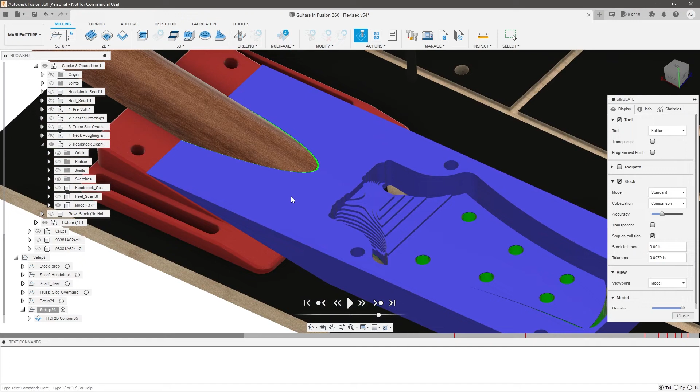Now we left stock to leave, and so remember, these might not actually even be plunging or touching anything. It might just be doing that simply because we were simulating a part of the process that's outside of the context of the previous operation. And so these plunges might even be less severe than what we're looking at here. So I'm not terribly worried about it.

So now we're going to clean up the top side or this back side of the headstock, and then we will switch to a ball nose end mill to do our final operation. So let's go to 3D parallel.

We've still got our 1/4 inch flat, so we are good there. And then in our machining boundary, we're going to select this back contour right here. And then we're going to choose these surfaces that we're going to be machining, leaving include setup model checked. And I have a suspicion that it's going to try to go into these holes. So we'll take a look at that in a second, and I can show you how to compensate for that.

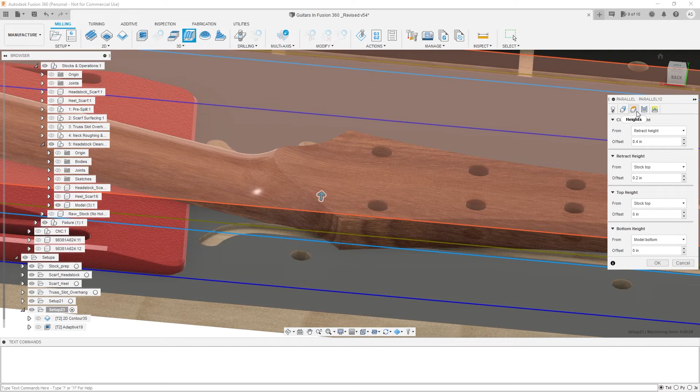Tool on center on boundary. So we're good there. And again, we're going to have to do our little trick as we found out. So stock top is fine here, but our retract height is going to be from stock top 0.5, and our clearance height is going to be from the top of this heel stock at 0. Again, it's really annoying, but because of how this is interacting with our Z height, we have to deal with this.

So then in our passes, we're going to do pass direction as 90 degrees, because if I don't do that, it's going to go this way, but we want our parallel to be going this way. Let's hide that heel side. And then our step over is going to be 0.03125, so a really fine little step over. And that should be good. Let's hit OK and see what happens.

Okay, yes, so it is trying to jump into these holes here, and those have already been machined in our very first setup operation. So we need this to pass over those. And for some reason, when I was developing this, I couldn't get it to pass over those, and I had to go find a solution for this, and I wanted to share with the class a really neat trick you can use for this.

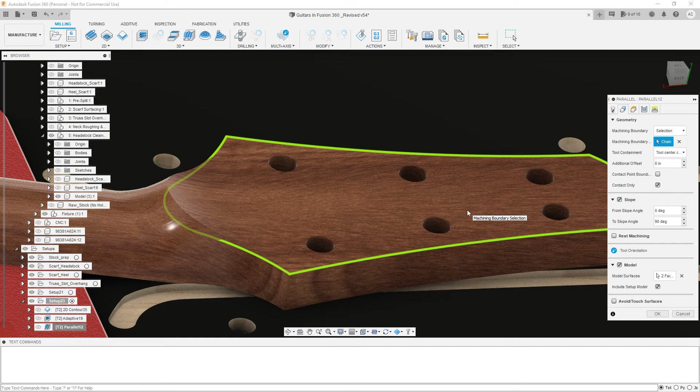So in slope, what this allows you to define is what is the minimum and maximum angle on your model that it will detect and machine. And so, for example, we have an angle here that's about 45 degrees roughly from our bottom surface here. But we don't want it to machine anything that's 90 degrees. And that's what these holes represent. They represent a 90-degree change in direction of our cutter.

So we can say from slope angle, we're allowing it to machine from 0 to, let's say, 60 degrees. We won't let it go beyond 90 or anything like that. In fact, let's do something smaller and see if it doesn't touch this front surface. You can see it left a little section where it's detecting that it can't cut that because of the slope angle. So let's go back to edit and change this to 60 degrees. Hit OK. And yes, now it's actually machining everything, and it's passing over these holes. And that's exactly what we want.

In fact, it kind of looks like it's going over our volute a little bit. Let's pull up our model and then go back to the setup. Back to model. Actually, no, it's not. It just looks like that because of the stock to leave. So let's simulate this real quick, make sure we're okay, and then we will do our final ball end mill cleanup. We still have those errors from the previous one that we're okay with. The last operation that we just put in, there's no errors, so we are good there.

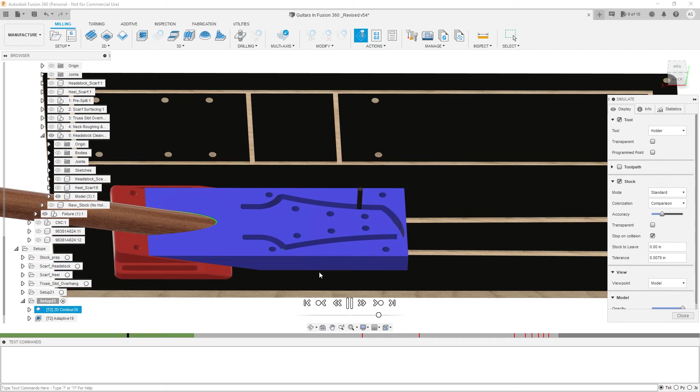And let's zoom through this contour and then clearing out the material. Turn off stop on collision. And then, yes, it's coming in and cleaning up that area. Let's slow it down. And yes, it is just simply passing over those holes, which is perfect. It's not trying to enter in. So we can speed that up. And now we've cleaned up that backside.

Now all we need to do is just switch over to our ball end mill and do another parallel pass on this surface right here, and then we'll be done. Okay, so let's go to 3D parallel, and let's switch over to our 1/4 inch ball end mill. And it looks like our feeds and speeds are a bit wrong. So 16,000 RPM, and we'll do 75 inches per minute.

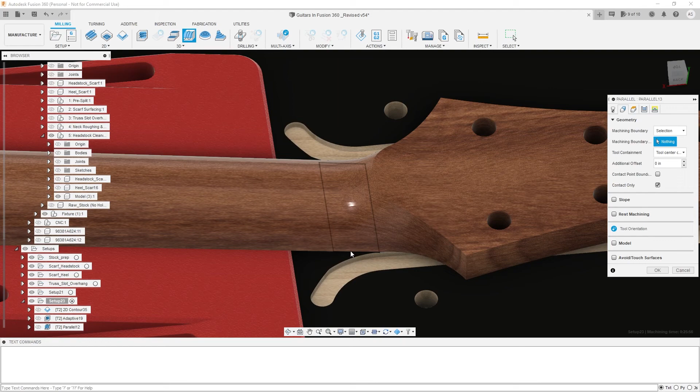And then go to our geometry tab, and machining boundary will be selection. Now we can either select each side of these, which may cause problems. We'll have to take a look. Or we can do silhouette, which will basically create a line around the entire model. So let's try it this way.

And then we will do avoid touch surfaces, and we're going to check touch. Because with this machining boundary, it will basically try to detect all of this as well. And we want to say, no, we only want it to touch these two surfaces. Okay, and then selection, we will select for machining boundary. We will select these two, and let's see if that works. If it doesn't, we might try silhouette or something. And that should be good.

And then model bottom is the fixture. Our top height is the top of our stock. So let's bring back our stock here, the headstock side. And then we do retract from stock top 0.5. And our clearance height, again, is our top of this right there. And let's make that 0.

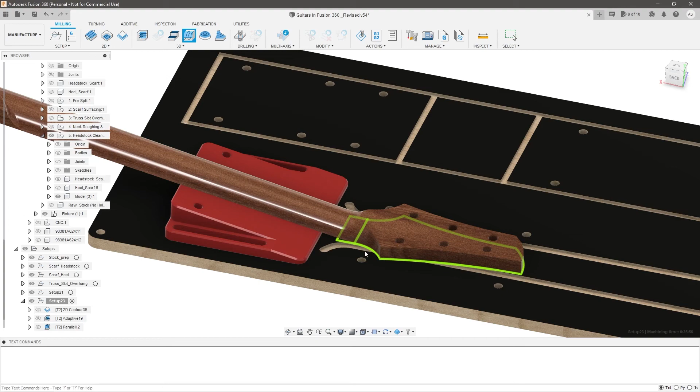And then in passes, we do want it to stay going in this direction rather than 90 degrees like we did on the previous op. So we'll leave that be, but we want our step over to be 0.03125 inches. And that should work. If not, we might have to change our machining boundary. So let's see what happens.

Okay, it looks like we're not hitting everything. So we're only getting about halfway down. So let's try changing our machining boundary to silhouette, which basically projects the entire body surface onto the machining toolpath. And let's see if that solves it for us. Nope. So let's go back and hit edit.

And let's turn on contact point boundary, because right now it's trying to stay within that boundary that it's projecting, but we're not allowing it to go slightly outside to make sure that it touches some of these areas. Hit OK. There we go. That's looking a little bit better. So we're actually reaching this full extent of this wing here. So let's right click and hit simulate.

And let's see what we got. Okay, we have some tool collides with fixture. We'll need to take a look at that as well. Tool collides with fixture. Yep. Okay, I have a feeling I know where that's coming from. So we'll take a look at that in a second. Okay, bringing out most of the material. And then we're going to do our cleanup on the back side of the headstock.

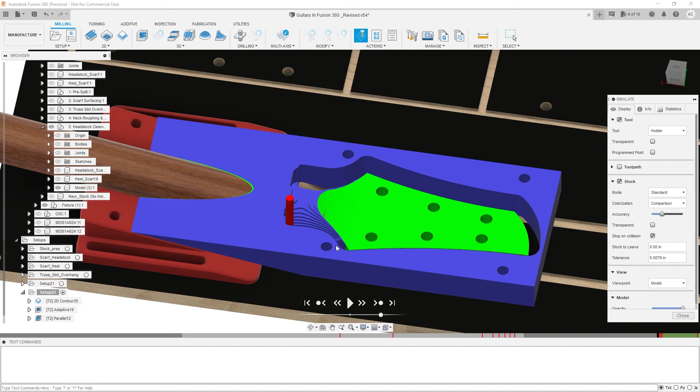And turn on stop on collision, and let's take a look real quick. Okay, and this is a tool collides with fixture. So that means that you can see here the little channel that I put here didn't take into account this little part of the neck. And so it's actually crashing into that, and it might crash into it right here as well.

I will go ahead and update that later on, but basically what you guys will need to do if you want to avoid that, unless you're fine with the tool actually plunging into that a little bit, it doesn't go very far. It only goes maybe like a 32nd of an inch or something. It's not a huge deal. But basically you'd have to provide a little bit of clearance like I did with this slot here for that tool. And yep, same thing on each side. And then it works its way through because now it's got the clearance.

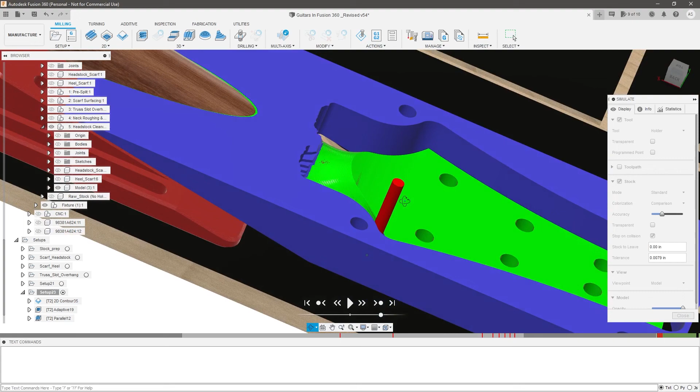And then this is a tool collides with fixture again, because it's going all the way down to the bottom. Yep. So that's all I would need to do to resolve these, is create an extra little channel around for this flipped operation, and we would be fine. So let's just make sure all surfaces are green. It does look like we have a little bit of a challenge here, so we might need to come back in and resolve that.

Let's play through the rest of this. Turn off stop on collision. Okay, so we have a little flat spot here, and we have a little flat spot here. So let's see if we can resolve that real quick. So the first thing we're going to try is right-clicking and do Edit. And then in the Passes tab, we'll try machining steep areas.

Because what this allows is for this toolpath to have a varying degree of step over depending on how steep of an area it's attempting to machine. So we can say the absolute minimum that we will allow it to have. Right now it's 0.003 of an inch. Let's make that 0.005. That'll be the absolute minimum. And then the maximum will be the one we set before.

And let's see if that resolves it. So you can see in these areas, it's going to take more passes. It looks like it might still be leaving a little flat spot there. So let's just simulate that and double check.

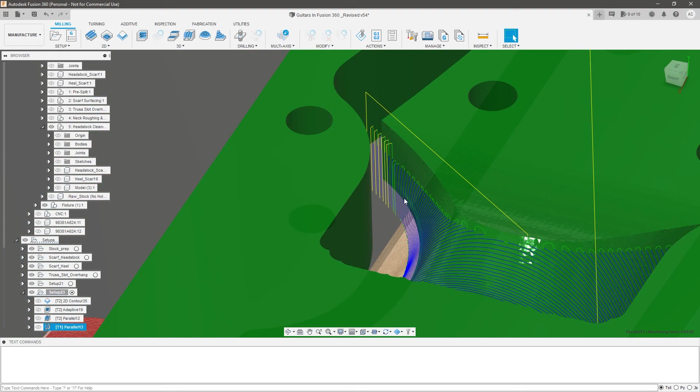Okay. Yep, it's still leaving a flat spot there, so I'm not sure how well we'll be able to adjust this, but let me try. Okay, so I spent a little bit of time working on this, and I was able to get it to clean up most of that surface, although there's still a tiny little section here that I just can't seem to figure out no matter what options I choose. So I'm going to have to, at least in my model, deal with that and just sand it out.

But let me show you what I did instead. So if I go back to Edit on the parallel, and I go back to my Geometry tab, let's bring back our model here. What I did was I flipped my Avoid Touch Surfaces and used Model Selection. So I said I want to machine these surfaces, and I included the setup model, so that way it's not trying to machine the other surfaces or machine over it.

And then on Avoid Touch Surfaces, instead of using Touch to touch these ones, I selected Avoid and selected everything else outside of that. What that allowed me to do is basically allows my toolpath to continue all the way over to the edge, whereas the way I had it selected before, just the way the programming works, it wasn't liking it very well. And then I tried doing machine steep areas. It didn't really help, so I'm not going to apply that.

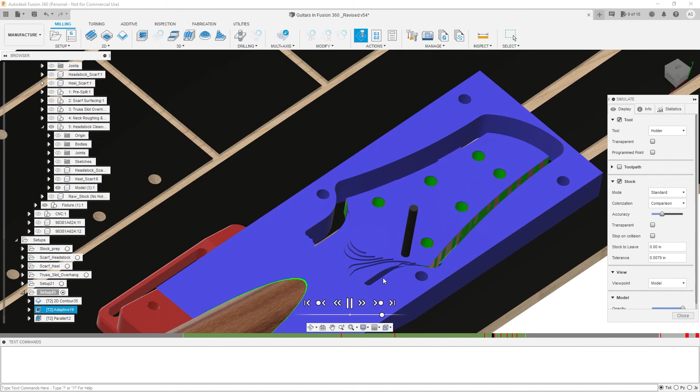And if I hit OK and we simulate the whole thing, you'll see what we're left with. It's not perfect, but it's pretty dang good and very easy to sand out. Again, these errors that we have right here are ones that we've already tested and are okay with. And these ones are tool collides with fixture, and we know how to solve that. So we did the contour, then the roughing, and now we're cleaning up the back of the headstock.

And then we are cleaning up this, and it goes all the way to the edge, which is great, but it leaves a tiny little flat spot right here. What you're seeing here is a couple thousandths of an inch, so it's not a big deal. We should be able to easily sand those out without much trouble. So I'm okay with that. But in your model, if you just want it dead on perfect right off the CNC, you might have to play around with the options some more. I wasn't able to solve that, at least in my particular model.

So, in summary, we processed our stock, cleaned up our scarf joint, cut the truss slot, and then flipped it over and machined the primary surfaces, and then flipped it over one last time and cleaned up the headstock. All on a CNC with a limited Z clearance and a low-cost fixture with just a 3D print to help us along the way. We had to do some workarounds with our clearance heights to allow Fusion to generate the toolpaths, but ultimately we came out with solid toolpaths and a nearly perfect model.

I do want to stress here that we are somewhat pushing the boundaries of what Fusion finds acceptable machining methods. Most companies that would produce these parts full-time would invest in larger machines and more robust fixtures to make this process more bulletproof, and Fusion CAM is primarily targeted towards those applications. However, I am confident that this process we produced today can allow just about anyone with a CNC to produce a good part. There is always room for improvement, however,